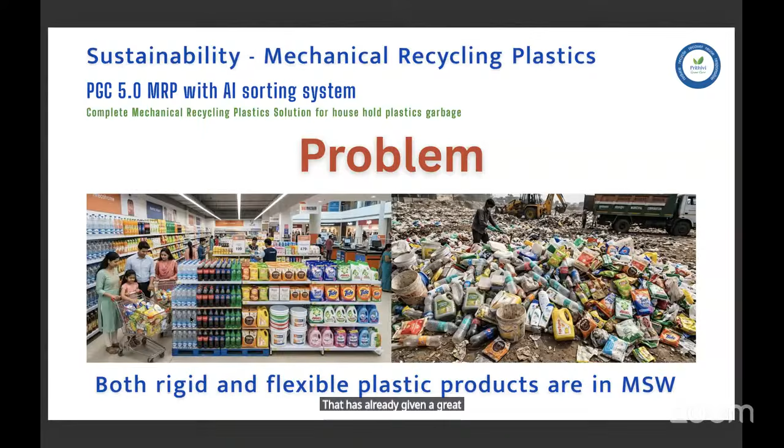Now I will give you one more rule which is going to get implemented soon. You cannot throw plastics like this anymore, because throughout the world the OECD organization has already given a clear mandate on this. Currently 71% goes to landfill, spoiling the entire ground, fit for nothing. Take the Kodungaiyur plant at Chennai - 635 acres completely spoiled. Another 430 acres at Solinganallur, near Pallikaranai, also spoiled, and now they are finding another place. You cannot continue with this, because once you do, you will not get oil. OECD, the Organization for Economic Cooperation and Development, is the governing council for the entire plastic industry, and they're saying you should become a member, otherwise you will not get the benefit.

So to become a member, currently we are only an active participant, not a member. To become a member, we have to implement so many formulas and regulations - that means we need recycling. Currently what we are doing is mostly informal recycling.

Ten years before, if you put out a PET bottle, nobody would pick it up, correct? But if you throw 100 PET bottles today, within half an hour somebody will pick them up. Do you know why? The cost of buying 1 kg of used PET bottle is around 40 rupees, because the rule already imposed on PET bottle companies requires them to use 30% recycled material in their product. So it goes into that segment.

So our target is to reduce landfill from 71% to 33%. Second, mechanical recycling, currently around 9%, needs to go up to 22%. And chemical recycling, currently around 1%, needs to go up to 20%.

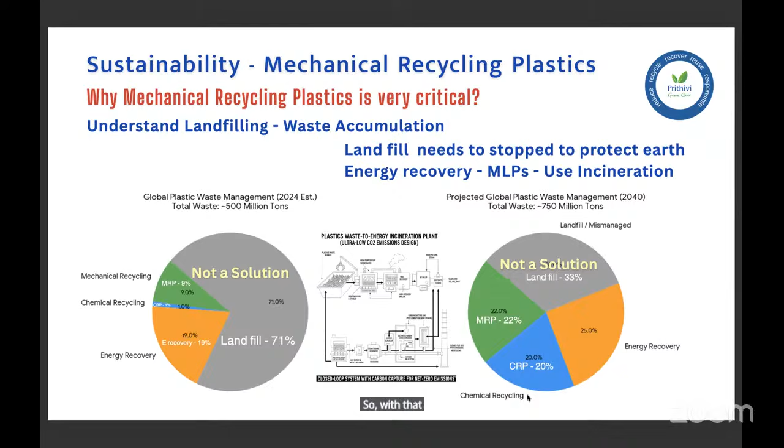So this means polyethylene or any recycled plastics can only be converted through mechanical recycling feasibly. There are still some other countries that say whatever the price, they don't mind - they want to convert it completely into monomer and back into polymer through chemical recycling. People are paying extra for it. So with that, mechanical recycling also goes up.

As I told you, 2025 is 75 million tons, which is going to become 300 million tons by 2040. And if you see global figures, it's 2,300 million tons going to 3,200 million tons.

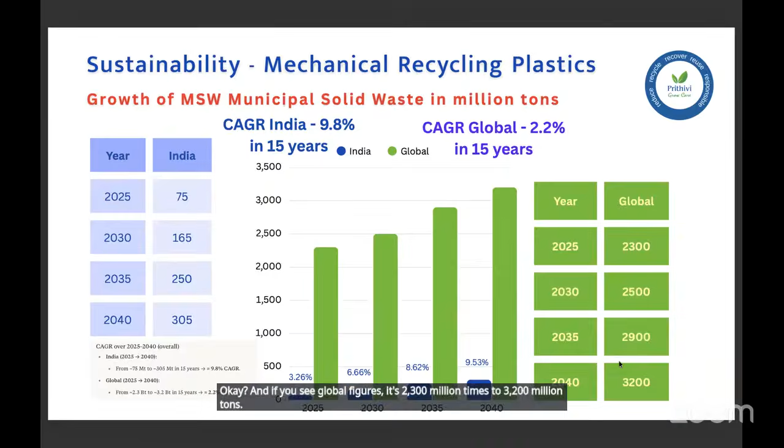300 tons of municipal garbage. Trichy, Tanjavur generates around 90 tons of municipal garbage every day. Approximately 10% will be plastics. So in Trichy, we take it 30 tons of plastic garbage created every day. Tanjavur, if you take it, it is 9 tons of plastic garbage created by all of us.

We are not doing anything. This is forgetting about industrial recycling and all which is happening. But all of us itself, 9 tons in Tanjavur and 30 tons in Trichy. I have all the data available. So what will happen is, I told you, 65% will be recyclable. Balance 35% has to be recycled only with chemical recycling, that is MLP.

The supplier, what he does, he makes a composite layer - that means a layer of plastics, maybe around only 0.7, 0.8 micron, which has all these layers packed in, made as a single extruded sheet. In that sheet, you are taking a packet. For an easy example, Lay's chips, Pringles chips, all the chips are coming in that packet. But if you want to remove that packet, remove all the layers individually, which is not feasible. So that is the reason we say it is not possible with mechanical recycling.

So currently the technology we are recommending is: we have to burn it out. You don't have a choice, because if you go with chemical recycling, it's very expensive and nobody will be buyers. We have seen the example of Europe. Whereas with mechanical recycling, I told you, you can fetch very high prices immediately.

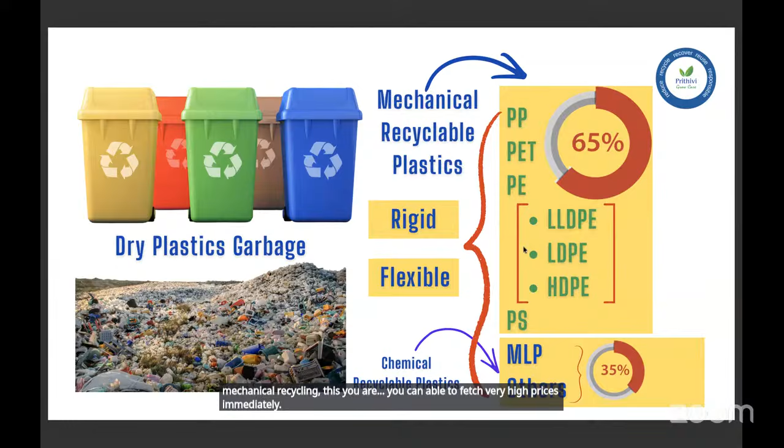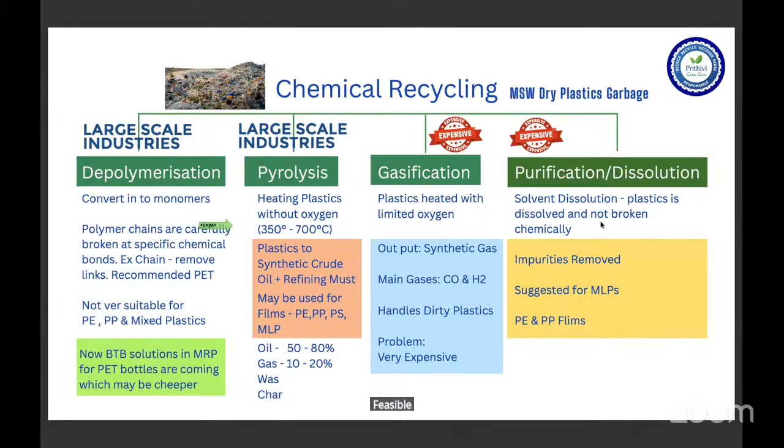So chemical recycling - I told you, depolymerization, pyrolysis, gasification, purification - these are different methods, and there are plus and minus for each, but everywhere it will not be feasible in terms of price. So I'm not going to talk more about chemical recycling. I'm going to talk about plastic.

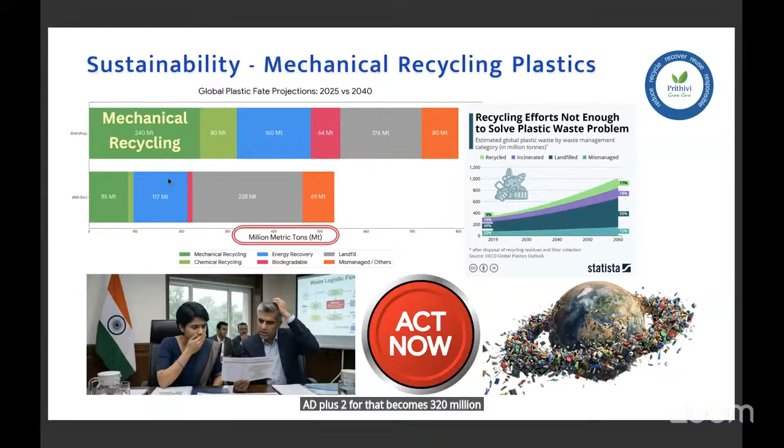When you sort out PE products, polypropylene, PET separately, and take polystyrene or multi-layer packaging, nobody will be a buyer, nobody will be ready to take it, because it is used only for burning. When I burn it, it creates dioxin and many other harmful things, so you cannot burn it outside. You have to go to a cement plant which has proper filtration methods, but the cement plant may say they don't want it.

If you want to give it, you have to bring it to them. Suppose you are at Trichy and want to give multi-layer packaging to Ariyalur cement plant, you take 30 tons in your lorry, pay vehicle cost and diesel, and go give it to them. They will say don't give it on Monday, give it Thursday or Friday, because their availability is not there. So according to their requirement you may have to go and give it, and they will not pay anything because they say they are helping you by burning it. So you have to spend your own money for that.

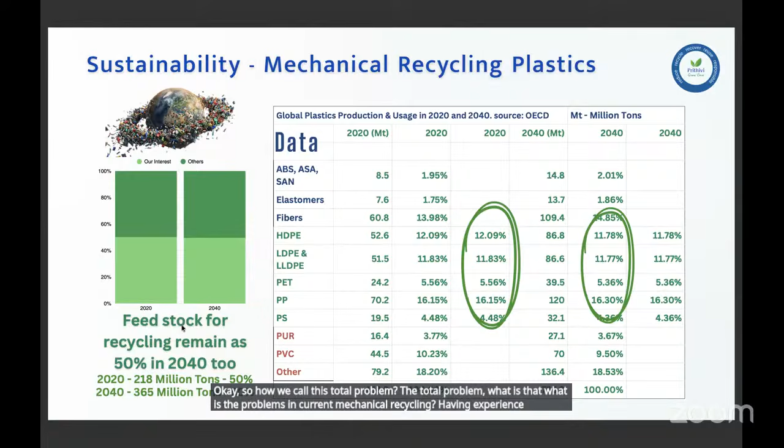So how do we call this the social problem, the total problem? What are the problems in current mechanical recycling? Having experience in Larsen & Toubro, a famous engineering organization, we understand the customer's problem first and give a solution for that problem. We don't sell a product or a machine, we sell a solution. The moment you come out with the solution, people will be ready to buy the machine, and probably they will keep repeating. So we try to understand what is the first problem.

The first problem is collection of garbage from different places, because everything has to come to one place. In Trichy you will have one place. In Thanjavur there is one place called Jamarpuram or something, where we have spoiled around 23 acres of land, and a lot of smell comes out. So the people around that area set fire to it at night, illegal firing, because for them removing the fire is not important, what matters is that the smell should not come. They think burning is easier.

So what we are doing is a sun and planetary model. If you take Trichy, one sorting plant can be at Ponmalai, maybe another sorting plant at Uyyakondan Thirumalai, another sorting plant maybe somewhere at Central Trichy, Thillai Nagar. Like that we can keep it, and all the garbage comes to that place.

You are going to sort it out separately, sort it out in the sense you separate by material. Once you sort it out, you send it to the person or extruder plant who has the extrusion for that material. PE will have separate extrusion, polypropylene will have separate extrusion, PET will have separate extrusion, so that you need not transfer it again back here, from there you can transfer directly.

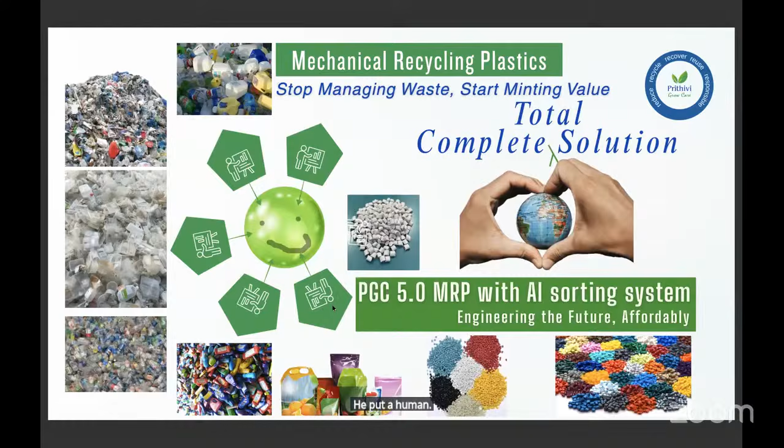So why our systems are reliable, first thing is we say how our systems are reliable. We worked out completely, we will make it completely reliable.

What is reliable in the sense is, I commit to you what the production output is every day, which nobody in India can commit. Why I am committing is because we are taking...

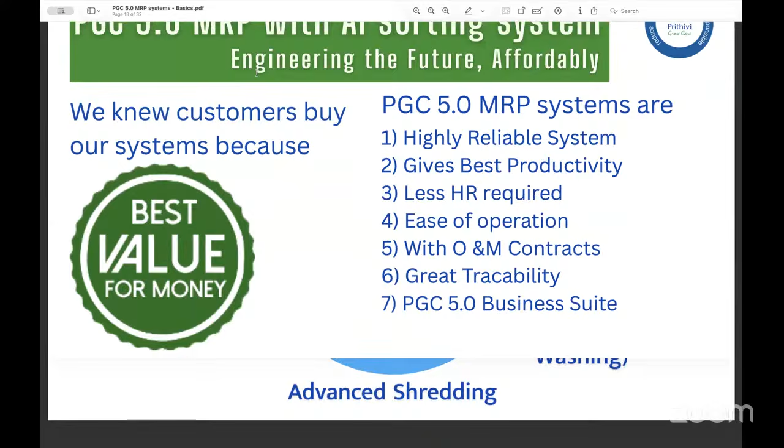Okay, sir. So coming here is our system, what we are giving is an advanced sorting system where we are using AI, artificial intelligence, coupled with deep learning.

See, the advantage of engineers is, what is the difference between engineer and scientist? What is the difference between engineer and scientist? The easy thing, instead of asking questions, I'll answer to you.

Applied engineering to solve scientific problems is what an engineer does - we apply what we learned in applications. So AI, artificial intelligence, is excellent, but what use is it to me if I just know about it? What is the use of knowing about deep learning, where the generation of images happens on its own, it keeps learning on the process itself? That's called deep learning, DL. What is the use of it?

Here's what we use it for: the conveyor belt. I told you the example where around 80 people stand on the line. What happens now is we reduce the same conveyor belt from 70 meters to 3.8 meters. In that 3.8 meter conveyor, our computer vision with AI and deep learning, built over almost 7 years, has around 2.4 billion data points available with us.

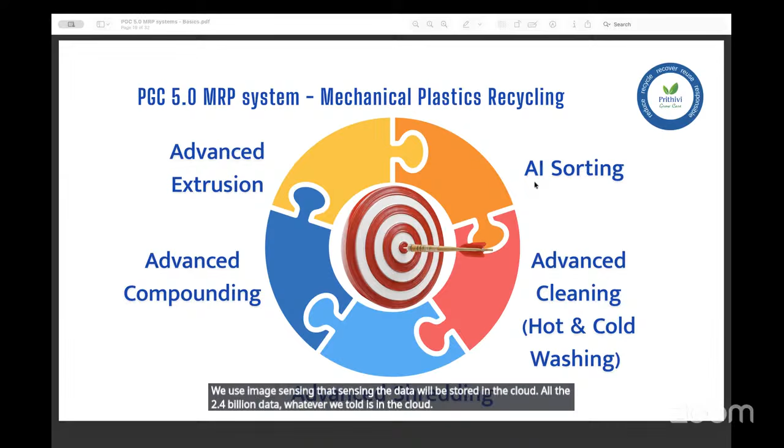We use image sensing, and that sensed data is stored in the cloud. All 2.4 billion data points we mentioned are in the cloud. So every machine sees the item and identifies it - oh, now a Harpic blue bottle is coming. By seeing 7,400 images, it will recognize that it is a Harpic blue bottle.

So generally, the traditional way of doing engineering is to use a robot to pick it up, to make it faster. Of course we use a robot, but we don't use any mechanical elements to pick it up - we use the robotic concept, meaning picking up. But how we are picking up, I'll tell you, it will be very interesting.

Probably you may not have heard this in your lifetime, I am telling you now. Earlier, people used so many robots to pick things up - instead of a human hand, it would be around 40 hands, to increase the speed. Instead of 80 people, it would be 40 hands or 40 robots. Here, we don't use any robot at all.

So what we do is, as the item on the bottle is coming, we know it is HDPE, what's called a Harpic bottle. So by seeing the image, we will know where the center of gravity is.

So what we do is when that image or bottle comes to the separation point, the controller gives a signal saying valve number 23 should be on - meaning valve 23 opens and gives compressed air. We call this firing. We fire, and that bottle gets separated - the HDPE blue bottle separates and falls a little further away into our bins. That means we have another bin or conveyor which carries the blue bits, which the video will show - you'll understand that. So this is how I am able to sort out very fast with this.

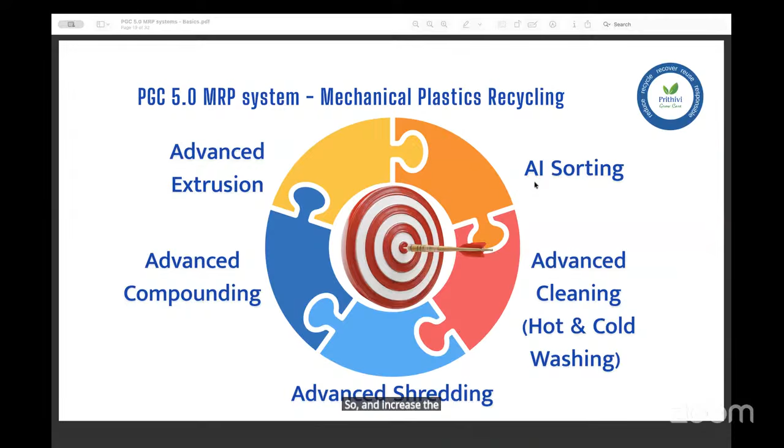So many things I talk on plastics, so we know plastic is better, so let us not talk more about it. We use this advanced co-rotating twin screw extruder.

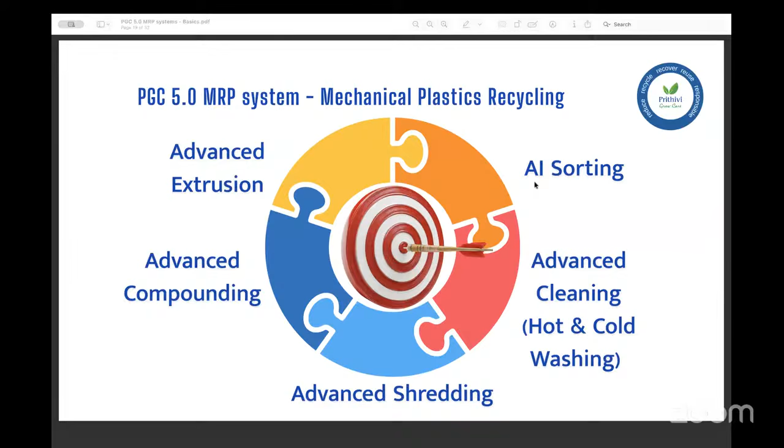What has happened? I am not able to move the screen.

It is economic, it is environmental, it is very easy administratively also. Additional benefit is it reduces garbage transportation costs. So these 5 plastic aggregators supply to the central system.

So how does it look like? First phase will be like this - if you take the example of Trichy, 30 tons of plastic is coming. When 30 tons of plastic comes in, it will be put through the trommel and it will go through a disc splitter or a splitter, whatever it may be. That splitter will spread the material.

Once it is coming, it comes into the AI sorter. This machine is an advanced machine where we currently have two sizes, 15 tons per day or 30 tons per day. So we get everything separated. I will show you a video so you will understand that.

And after that separation, you segregate it and compact it by means of a baler. Baler means you bale it, you bundle it out into particular units. So you bundle it out. This is how we do it in the first phase - that is the aggregator.

So in the second phase, you take that output and shred it, wash it out, clean it out - everything. Then go to the first stage extrusion, then come to the compounding, then go to the second stage extrusion, and this is the twin screw co-rotating screws. Output would be recycled plastics in granules. Since I am using water, the water needs to be recirculated, so we need to have an ETP.

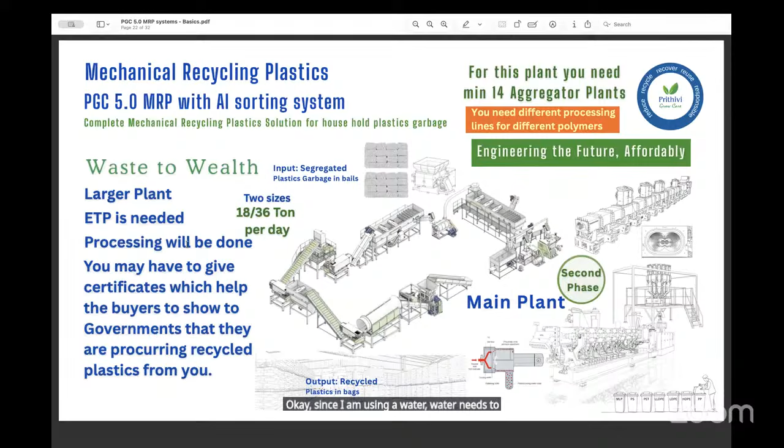Okay, so this is the first phase, and the second phase I am telling you. Okay, these are the things needed for that.

So with this, I will show one small video, or I don't know whether I can show it. Dr. Selvaraj, is it possible for you to show the video? Sometimes when I show the video, the audio is not coming. I'll send you the video by mail to all of you, or he will share it. If you have any doubts, I'll be happy to answer and clarify to the best of my knowledge.

Sir, kindly send it to the admin, sir, so you'll be able to play the video. Rajesh, please send the mail ID so the video can be played. Wait a minute, I'm sending it, I don't know, Arvind, I'm sending it to Dr. Selvaraj, I have his mail ID or his WhatsApp number. Yes, sir, you can send it to me, sir. I'll send it, I'll play it. I have sent it to you. Okay sir, I'll note it, and I will stop my sharing. Kumar sir, did you send it to me, sir? Yeah, I sent you on WhatsApp. Selva.mk, WhatsApp. Okay, yeah, WhatsApp.

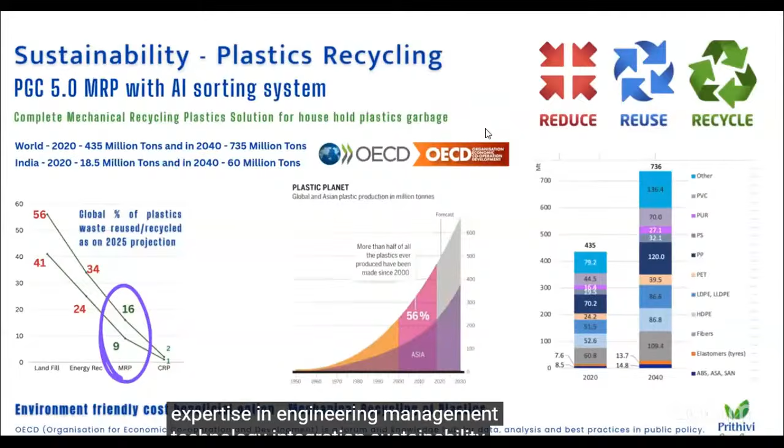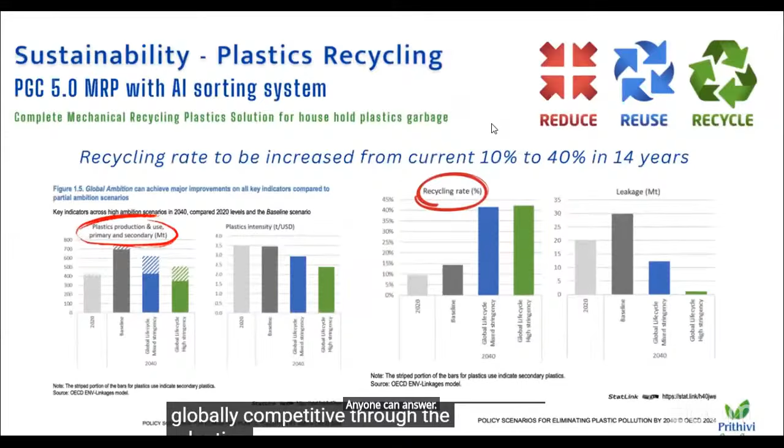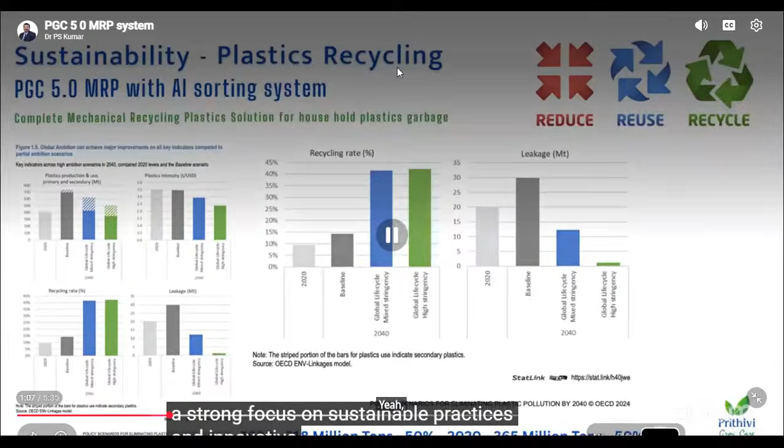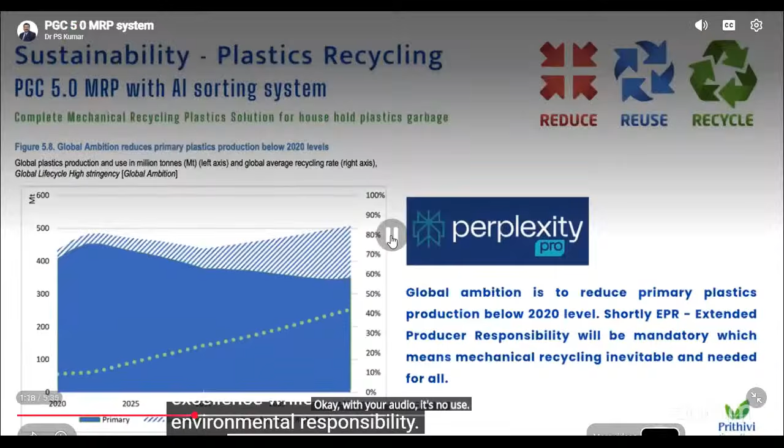We are not getting audio. Is anyone able to get it? No audio, sir, first few seconds there will be no audio. Only video is playing, video and photo. Probably that is the problem, but you can share the link to the group so they can see the video with audio. Without audio it's no use, disconnect - we will go to the question and answer section. No, we will see that, we'll see the video, sir, the processing video. Okay, you will see it.

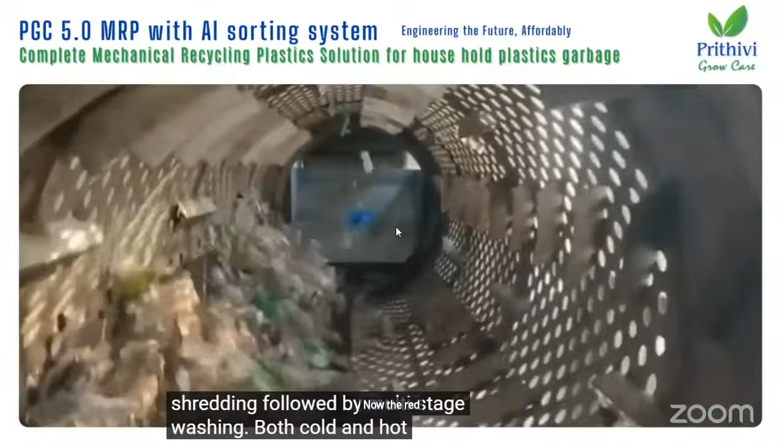Now the red article is getting separated. On the right side you have the blue article. This is the trommel.

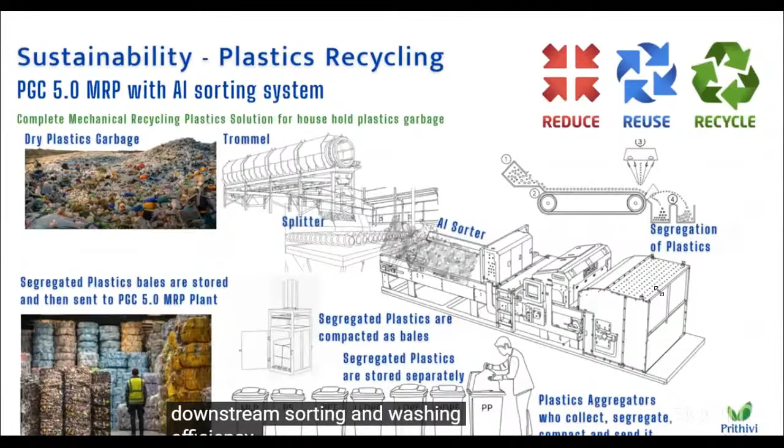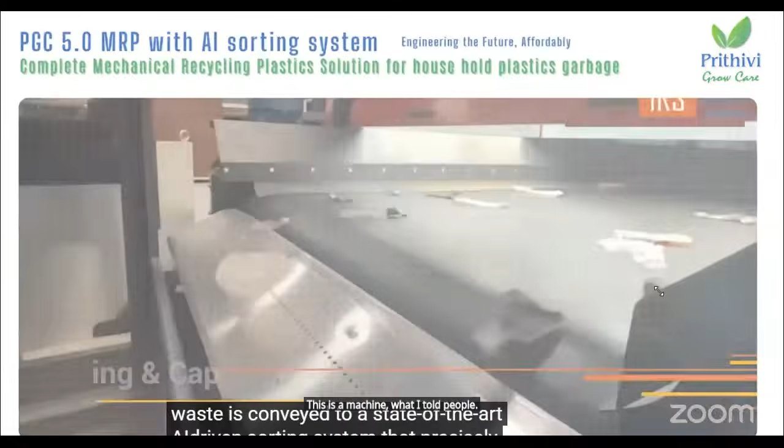This is the machine I told you about. Now you can see a lot of holes here - this is compressed air, and it will fire, meaning it gets separated and falls from the other side. Whatever falls below goes and comes on a circular conveyor, and again it will come back. Eject means throwing it and putting it in a separate bin.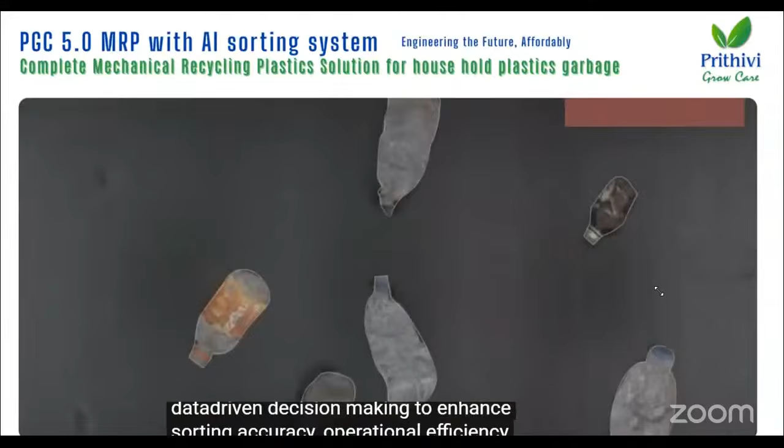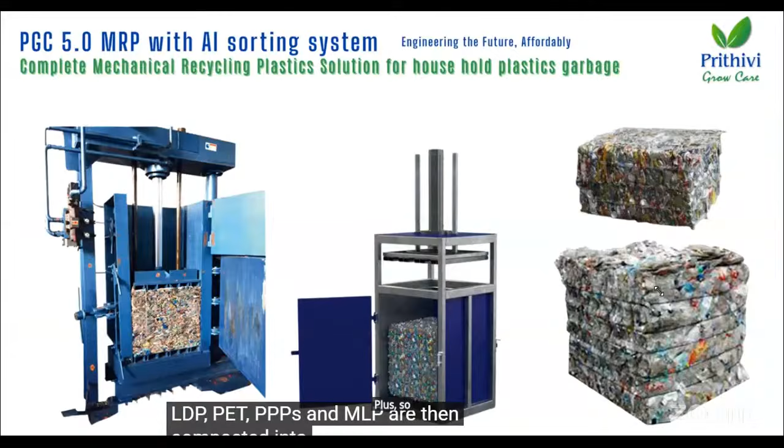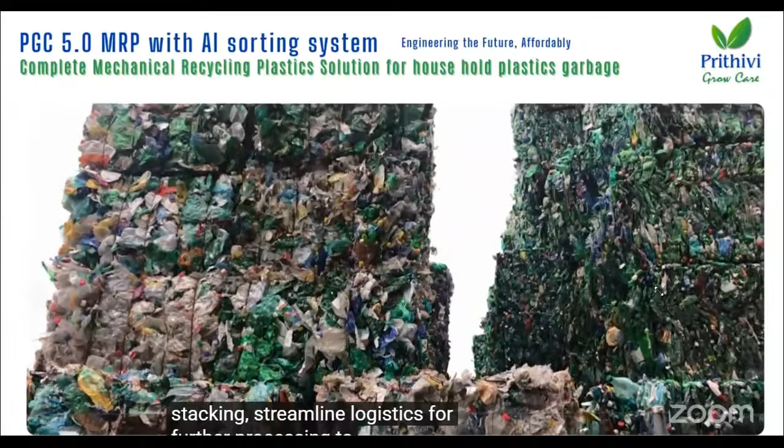This is a baler where you keep the plastics and compress it by means of a hydraulic press, so it gets compressed and packed like this. It will reduce the volume and increase the quantity for transportation, so the transportation becomes effective.

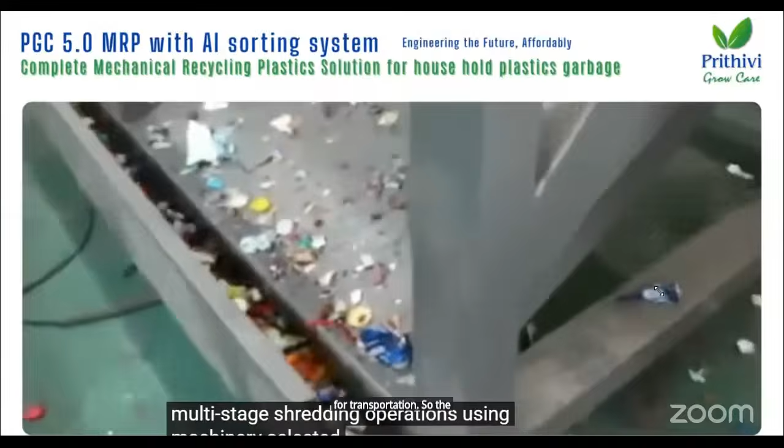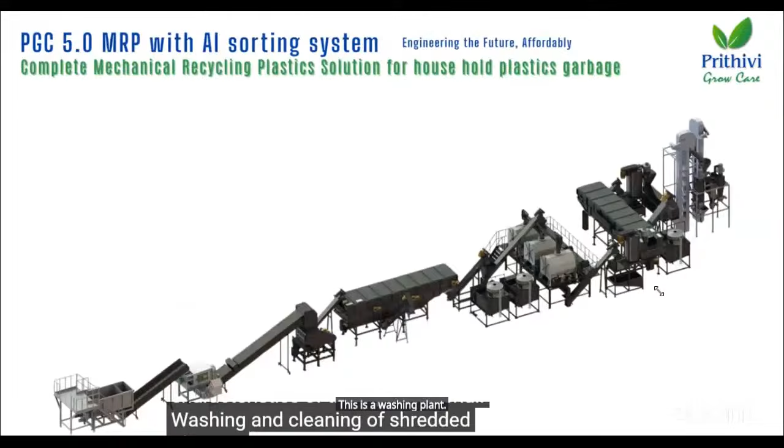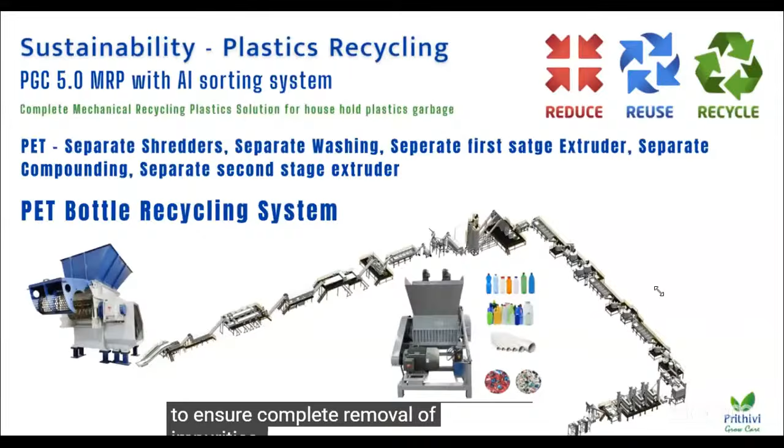Here is the grinding - a multi-point, multi-stage grinder, not a single grinder. This is a washing plant; you cut it into pieces and then wash it out. This is a co-rotating screw, and the extrusion with degassing, which removes the foul smell and other things.

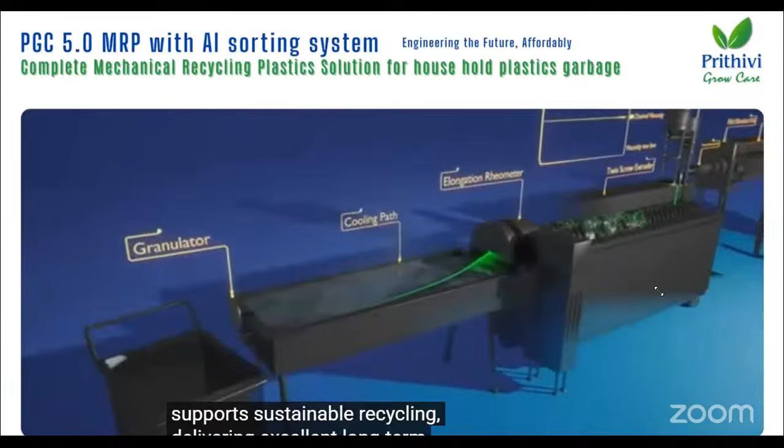This is a compounding, a gravimetric compounding which measures and accurately adds the things. It's a secondary stage extrusion where you can convert it into pellets, recycled pellets.

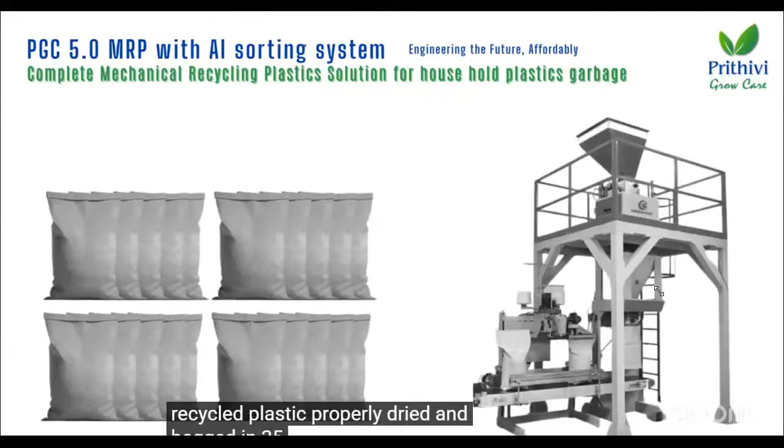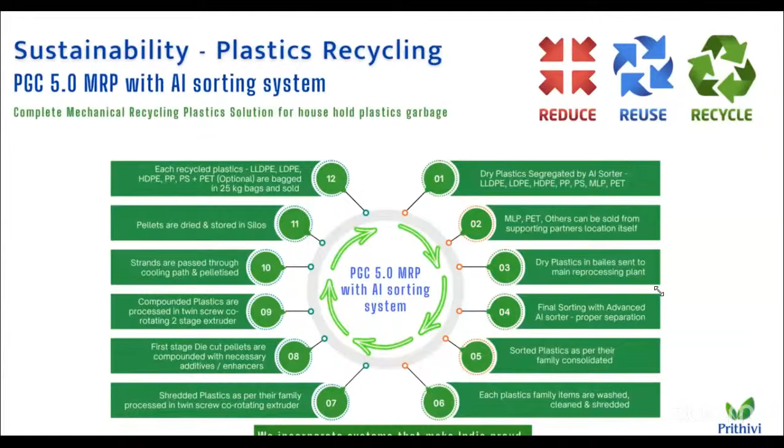Wow, 92 people, very good. Happy to see 92 people participating, Suraj.

Any questions? Yeah, there's a question I have posted. I'm Kannan, please see that. Could you please read it out, because I want to answer to the people.

This is my concern. You do a tremendous job, thank you. I really mean that, the amount of garbage produced. Kannan sir is a quality guru, a practitioner of Quality Circle Forum of India, an international jury, and a quality guru of a BHEL person. Thank you, sir. It was an amazing lecture, and I'm really happy and thrilled to see the efforts you are doing, it is one of the benchmarking organizations. I appreciate you, thank you so much. My concern is this: you do a tremendous job, but the amount of garbage thrown outside or being produced, how will we be doing recycling in such a way that will achieve the sustainability goal? One is you have to create awareness, training, and so on. In that line, what efforts are being done now?